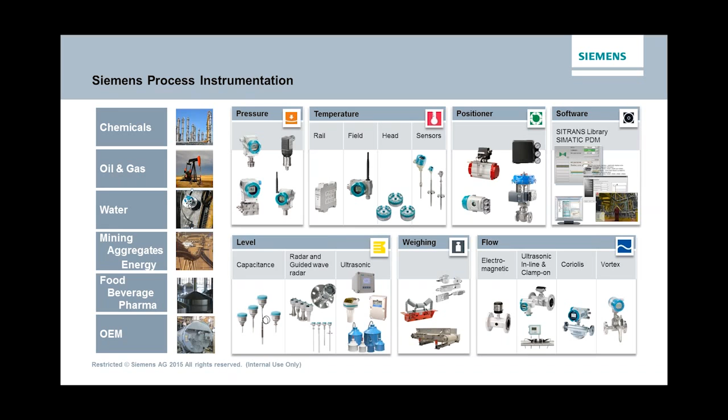Here is just a quick overview of the portfolio that Siemens offers. We've got pressure, temperature, positioners, and this is the area that I'm responsible for - capacitance, radar, guided radar, ultrasonics, controllers and transmitters. Today we're going to be focusing on transmitters, which are designed for short range. We have weighing and bin meters and such, and we target all types of industries - chemicals, oil and gas, water - and also there are a lot of OEM customers that purchase our product to fit it with their solutions.

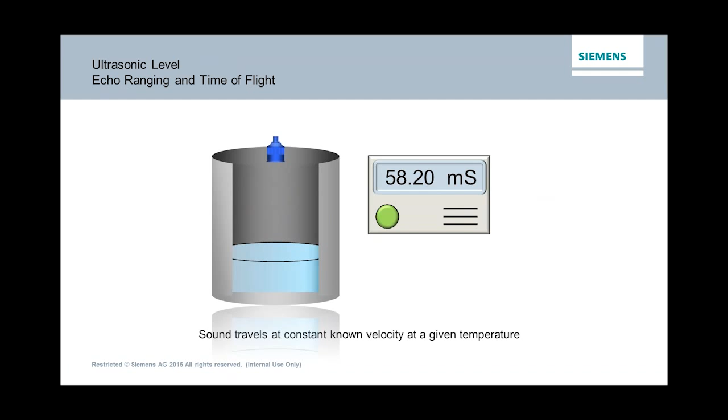And I'm glad to say that same functionality and everything, it's coming in at a third lower than the price. Not a third the price, but just one third lower.

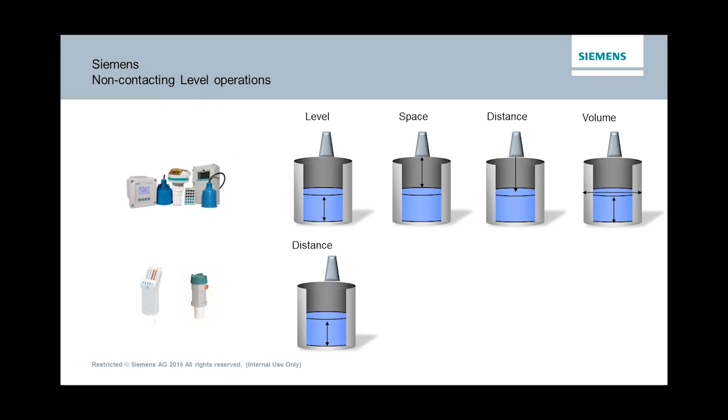But of course, when an instrument can do more, this also costs you more. So the application will dictate what instrument is best suited for you, and what needs you have to choose the right application. But today it's not about products.

It's about learning a little about sonic intelligence and where you use it. Sonic intelligence is what we use to provide a fast and easy product setup. And you will see today, in the industry, instruments have become really easy to set up.

In some cases, instruments will have wizards you can follow. You don't even have to open the manual. They've gotten so sophisticated, and the algorithms and features do a lot of the work that you had to do manually in the past. So you don't have to do that anymore, except in special cases.

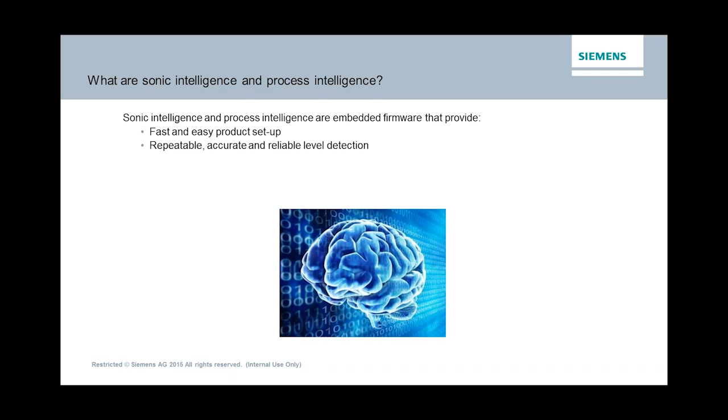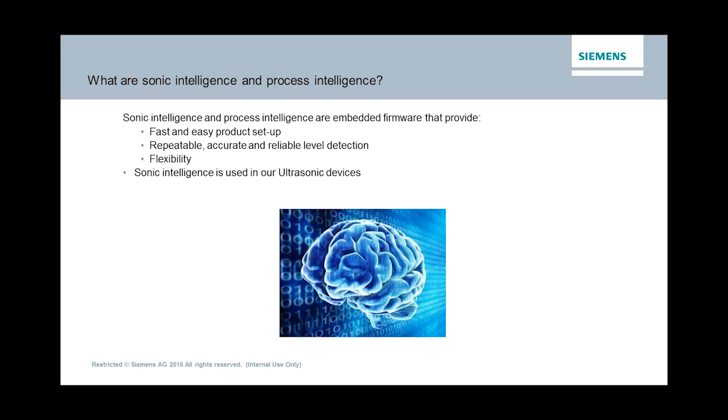The sonic intelligence and process intelligence give you repeatable and accurate measurements, and flexibility in case you want to read level, volume, open channel, all those things. Use sonic intelligence in ultrasonic products, and process intelligence in radar.

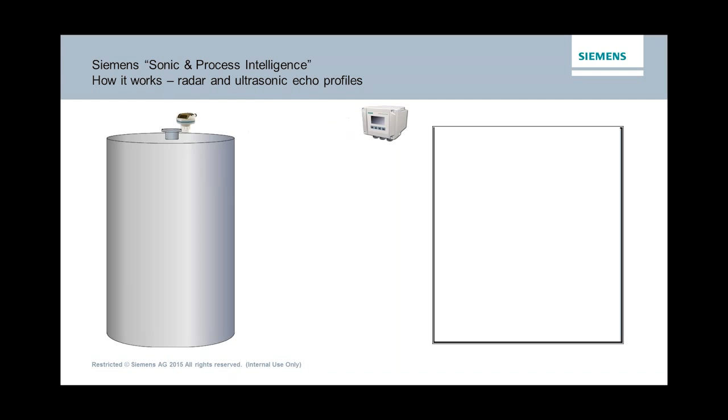Here's an example of what happens in a tank. Specifically, as the level goes up, there are multiple signals - not just one signal being sent. This can be for radar, ultrasonics, or even a transducer connected to a controller. The principle is the same: you have a pattern, a signal traveling down to the product.

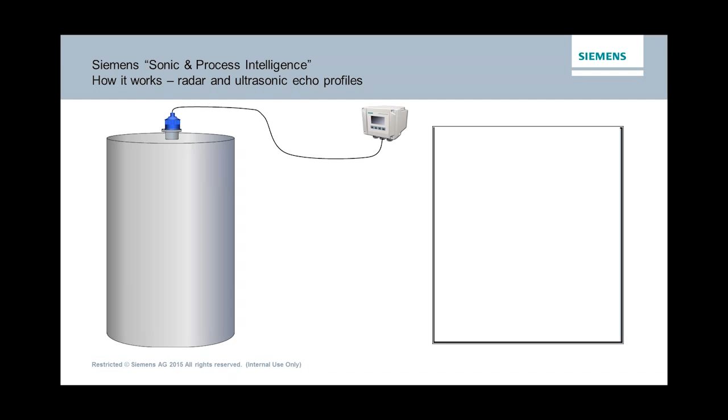In some cases, if you're talking about a metallic tank and using a lot of power, there can be acoustical noise from the fill stream. All that gets converted to some kind of signal that's picked up. And if you fill it up, there's more bouncing on the surface of the product back and forth, and that creates multiple signals. So all that needs to be handled and eliminated.

You don't have to worry about how to do that, but it's important that you understand that if you have too much of one thing, like noise, you might have to do something to minimize the effect. So we filter that.

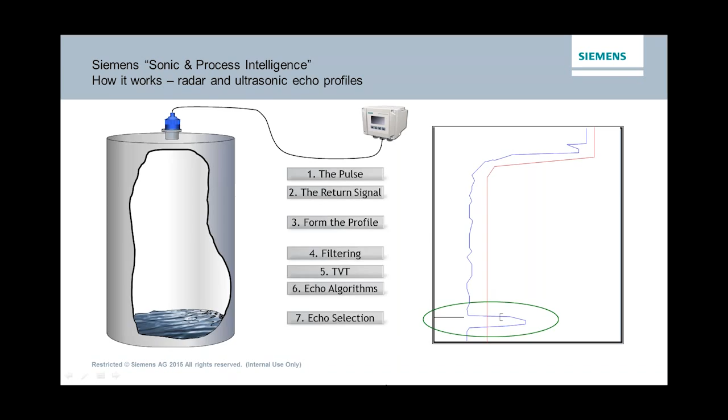In terms of filtering, you don't have to worry much about it. We do it automatically. Algorithms is another story.

I mentioned there are multiple echoes that you can get, and here's an example where you see that this echo crossed the red line, and we have another broad echo that crossed the red line. So those two, and here's another echo that looks like an echo, but it's not big enough to cross the red line, so we don't even evaluate that.

In most applications, 95% of the time, you don't have to do anything. But based on the installation, based on the standpipe and things like that, you might have to make some changes to this. So having a little bit of understanding what that means—not only having the understanding, but having the capability of doing it, because not everything supports this. Having this can help you maximize or eliminate things that can cause problems in an application.

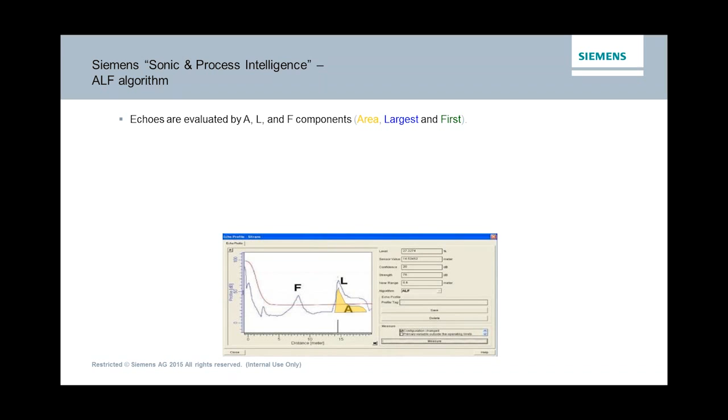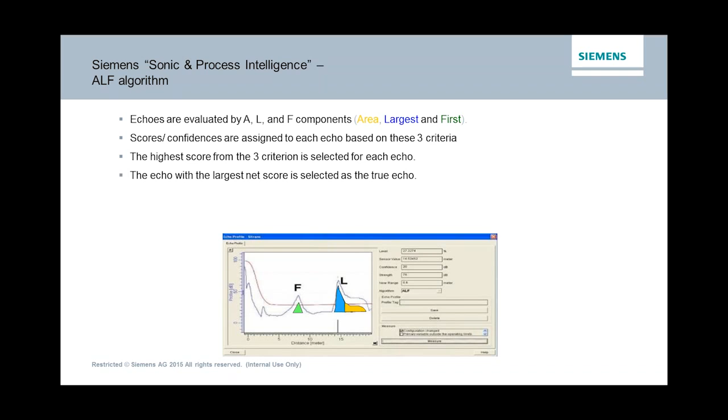So let me explain a little bit what this is. We're looking at the criteria, and based on the score every echo receives is the one that's going to be selected. So we're looking at how big an echo is, or the area. We look at the area of the echo, every echo—this is the area underneath the curve. We also look at how high it is, or how tall the echo is, and also is it the first echo, or in other words, how close to the face. So we look at all that and start doing a lot of mathematics behind it to select the right echo.

In the example that I'm showing, you can see that this one in the green circle was selected because it has the most area and it's also the largest. There are many variations.

There are situations where you might want to select the largest only. In some situations, you might select the first only, and I'll show you an example in one of the applications that I will show you, the actual applications. In some cases, you want to show the area—area is best used with solids. So LA, or largest in area, is best used for solids. For liquids, BLF, meaning best of largest and first, is best suited for liquids. But there will be situations where you might want just largest or first, and I'll show you a couple of examples of that.

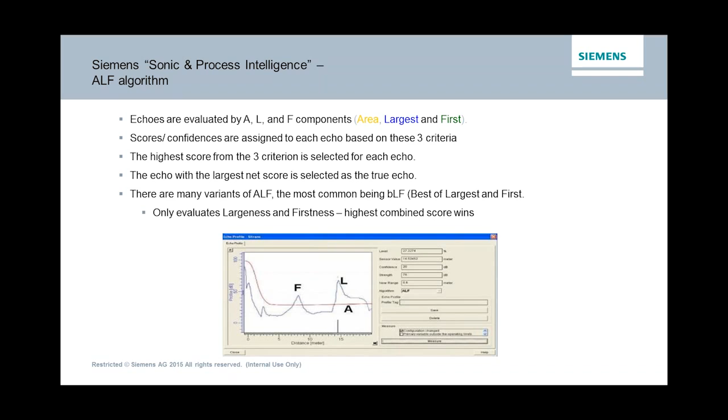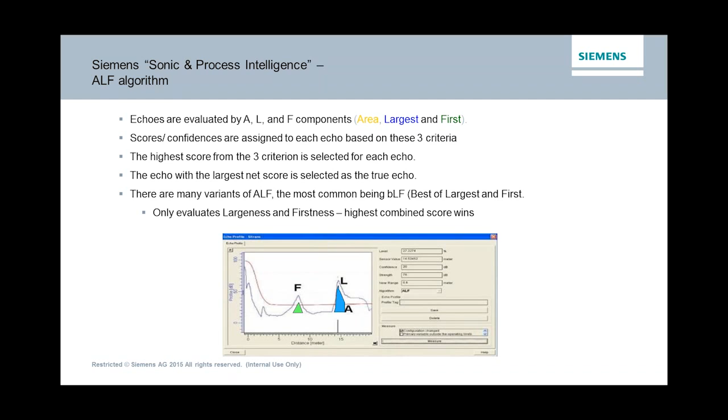You can only select one and give all the weight to one echo, and that will be the one that is forced to be chosen.

So, mounting considerations. Before I move into that, I want to say something that you might be familiar with—some rule of thumb. Some people will tell you it's good to follow a 10-to-1 rule. The 10-to-1 rule means for every 10 feet you go down, make sure your instrument or your sensor is 1 foot away from the wall. That is a 10-to-1 rule. So if it's 20 feet, then you need to be 2 feet away from the wall.

There's two assumptions here: one, that you're dealing with a sensor that has a 12-degree beam angle, and also that the wall you want to be away from is a smooth wall, not one with a ladder. If you have a ladder, you need to make sure you be a little bit more away from that ladder. Again, if you're using a 6-degree beam angle, then you can go 20-to-1.

But a 10-to-1, if you apply it to most things, you'll be okay. I like to say either one of these: use a 10-to-1 rule, or 1/3 the radius of the tank. If you have a process connection that is 1/3 the radius of the tank, you're in good shape.

So here's an example of installations, and they show you—hopefully you can see.

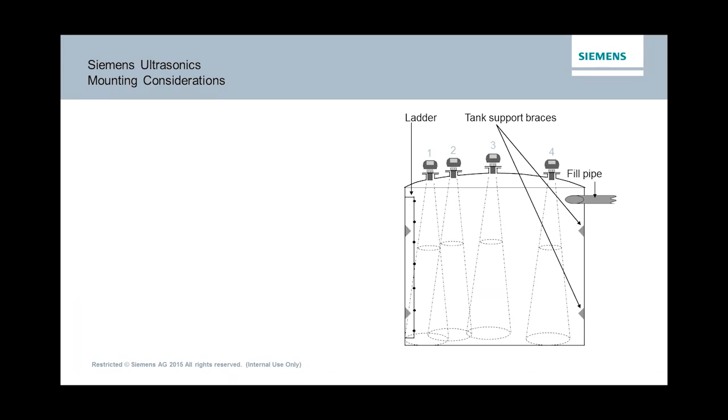You show the different positions, and my question to you is, what is the best location based on what I just told you? Is it 1, 2, 3, or 4? Location 1 is too close to the tank wall, and if that is the only location you can install it, we could work with that and do some suppression of the signal, but it takes a little bit more work.

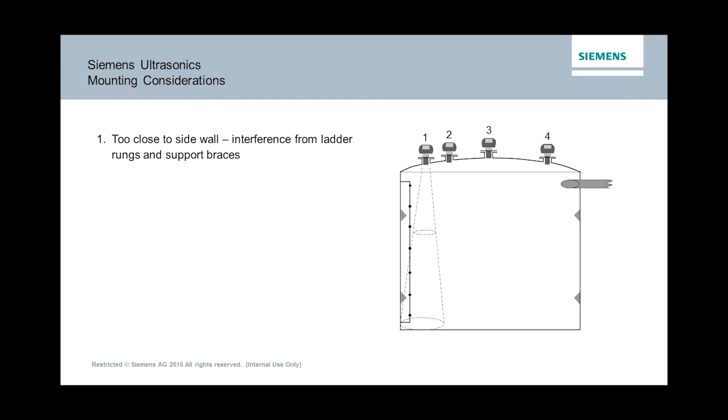Location 2, that's practically what I was saying earlier, is about one-third the radius, roughly. And that's a good place to install.

Location 3, we can work with it, but now we get this parabolic effect. What that means is there's going to be a focal point, typically around 80 or 85%, where the focal point will happen. You're going to get signals that add up and signals that cancel out, but some of the signals that add up double or triple in size, and they're more attractive, and they look farther away.

So you might have a situation where you say, you know what, I'm almost full, but my reading is telling me that I'm 20% full. That's wrong. It could be that you're in the middle and you catch a multiple echo. So the ideal thing to do is move it away from the center.

But if you don't have a process connection, then you use the algorithm and tell the unit to lock on the first echo, not on the largest, because the multiple echoes tend to be larger because they're adding. So that's what you want to do.

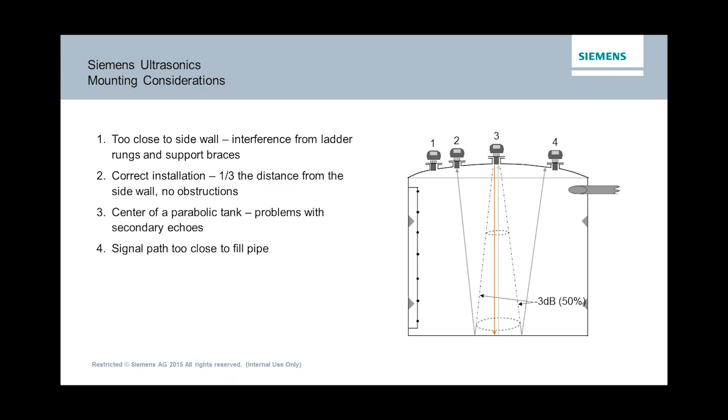Location 4 you don't want to use, because the fill pipe will be on this side in this case, and it will interfere with the signal path. And we don't want that. It will work when there's nothing coming in, and it will fail when product starts coming in.

Another key point: all non-contacting devices—that is, radar would be one, ultrasonics would be another—they require a blind zone or blanking zone. And it depends on the model. Some can be 12 inches, some can be 10, some can be 2 feet.

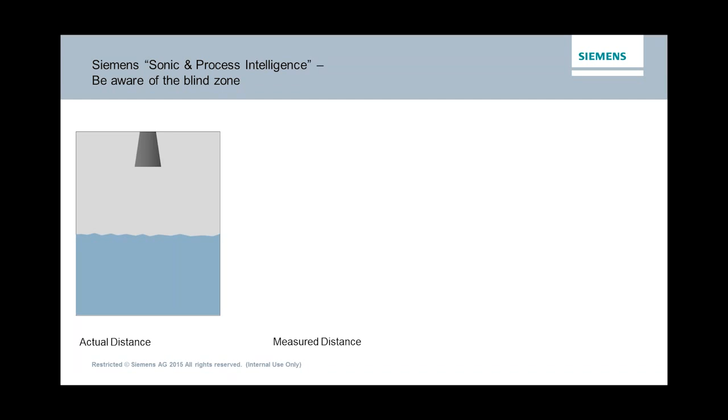But don't bring your product inside the blanking zone, because then you start entering an area of contention. So if that is the blind zone, the big area, here's your product, and as long as you stay below the blind zone, you're fine. Again, if you enter the blind zone or blanking zone, the behavior can be random, and the more likely conclusion is there's something wrong with the product, when the reality is the material is entering that area.

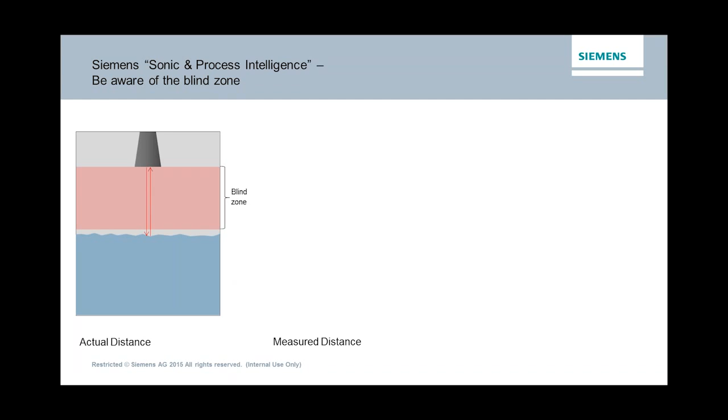This is one of the reasons, if you have a small tank, you might consider using guided wave radar, because guided wave radar allows you to bring the level higher, or capacitance—I'll mention a couple things about capacitance later. If you're dealing with a small tote or tank and you cannot afford to lose 10 or 12 inches of that tank space, think of using guided wave radar or capacitance.

That allows you to get to, there are models that allow you to get to the very top, depending on the model. They could be more expensive, but today the price has come down, so it's a feasible solution.

A small tank will require, if you're dealing with something like a barrel, more likely you want capacitance. But if you're dealing with a 10-foot tank, more likely you have space to spare, and having a blind zone is not an issue. You can also have a standpipe, but we want to minimize the standpipe or process connection length or height. They bring other problems—we can work with them, but they're not a simple 1, 2, 3 situation.

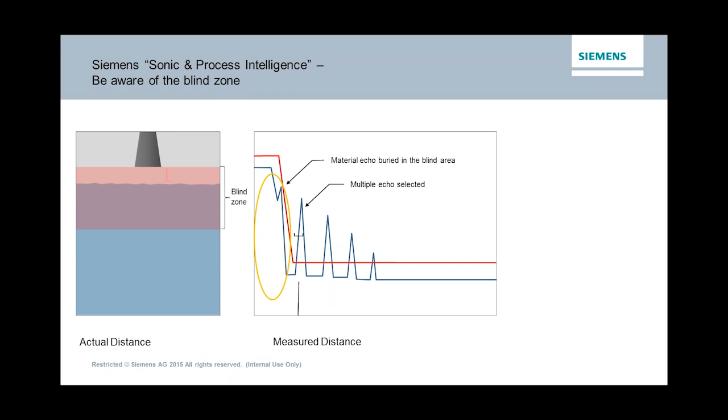And it gets worse as you get even closer. The level gets higher, and now the signal goes all crazy, and multiple echoes are occurring, and now we're deselected from this signal over here, and we're reading here.

Why do we need this space? It's because in ultrasonics there's a crystal being excited by voltage to resonate and send a signal and travel - in other words, an echo. It requires some time to reach a steady state, to settle down and be able to receive. But when it's happening too quickly, the crystal is still excited, still trying to reach steady state, while another signal comes back from the outside and gives it more excitement, so it never reaches a steady state. That's where the contention begins.

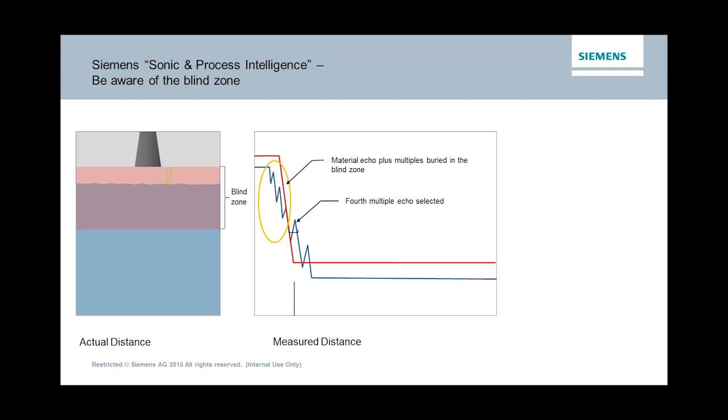I could express this like a dialogue: it's best when one person talks and the other listens, so the whole message goes through. When both talk, some words will be understood and some won't, and the message is convoluted and you lose a clear message. Same with this - that's what we want to make sure, that we don't interfere with the blanking zone or blind zone.

Other things to consider: if you're dealing with applications that are really hot, above 212 Fahrenheit, or with vapors. Solvents create vapors, whether due to the process or from overheating in summertime, specifically in Texas, Arizona, places that are really hot. Or if you're dealing with severe dust or a slightly foamy surface.

I say slightly because the best technology, not the solution, but the best technology for foam when it gets a little heavy is guided radar, single rod - that's what you want, it's not a solution. Foam is a problematic issue for technologies. Also, if you're using vacuum or extreme low temperatures like cryogenic, ultrasonics is not suited for that - those are radar applications. So knowing this, you know where you can use ultrasonics: stay away from volatiles, vapors, high temperatures, and pretty much everything else you can do with ultrasonics.

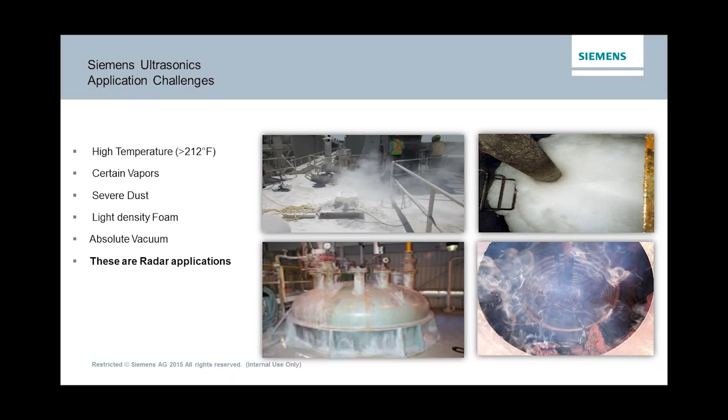Some application examples - I'll show you some products that are good for small vessels. This is the one I was telling you about earlier, the LU150. It's a two-wire device, good for a 16 foot range. You can program that with 2 buttons, set it up for 4 and 20, and it can be 2 feet to 3 feet, or 2 feet to 10 feet, whatever you need.

140 Fahrenheit maximum temperature. Even though it's a new product, it's based on a platform with a lot of experience, so the functionality is the same. It does have a better enclosure housing - this one has an IP68 housing, meaning it can be submerged under water 2 feet down for 24 hours with no ingress in the product. While submerged, the product doesn't work because the speed of sound travels way faster, but once the condition is corrected, your instrument is ready to roll.

This can be used in chemical storage tanks, solvents, additives - again if you have solvents and, like I said, inside a building where vapors don't exist, you can use it there. Flotation cells - this is mostly for mining. If you have questions about that, I can come back to this picture and explain something about it.

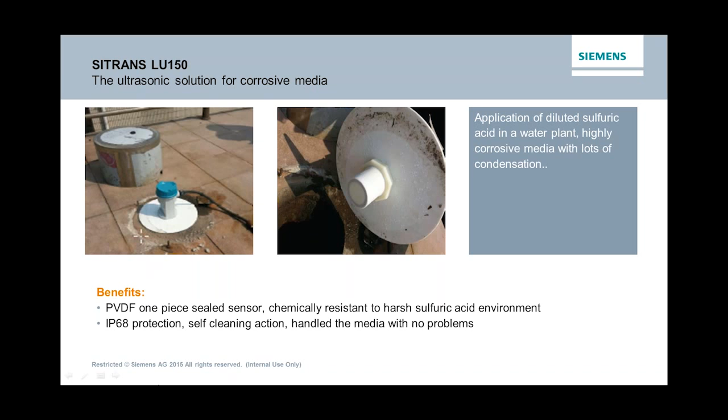There's some condensation - I don't know if you can appreciate that. The mechanical action of the crystal tends to push that moisture away and provide a reliable measurement. If the condition of moisture gets to be too much, then you've got to find other ways to keep that moisture away from the sensors. But the key here is that it's compatible with corrosive media, and it's an inexpensive solution, like I mentioned earlier.

This is an open channel. I know that it's mostly closed tanks and totes, but just to show you, this was using an open channel. It's not the ideal solution for open channel, but some customers don't want to spend the money or don't have the budget for that. So in this case, you take the level measurement, and the conversion to flow is done at the PLC.

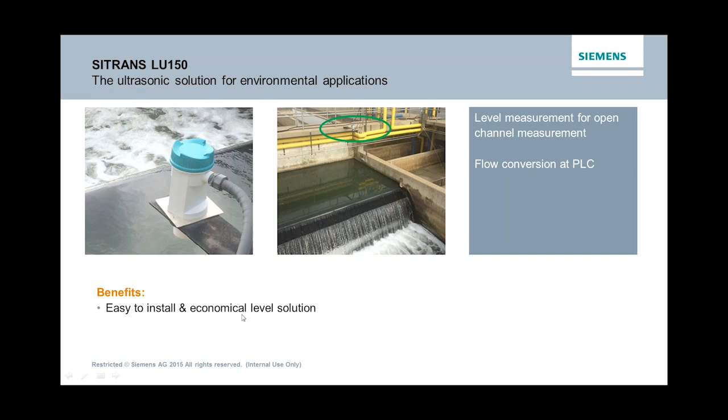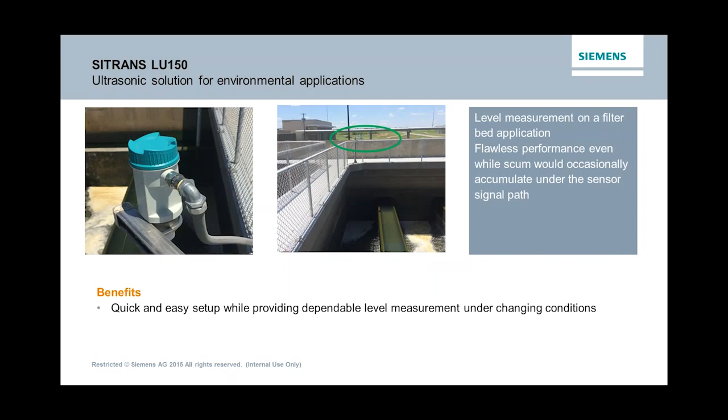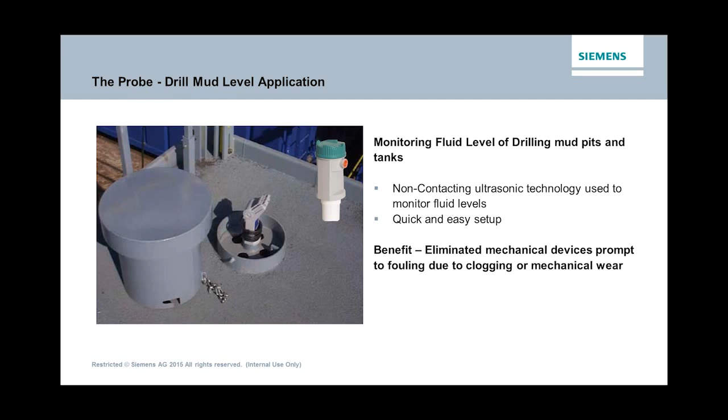The LU150 can be used for this application, and it can be used for that. The Probe has been in the market for a good while, for a few years. I want to just give you an overview. It's a two-wire device, 20 or 40 feet. This one has HART, and I'm mentioning it here because I've got some examples.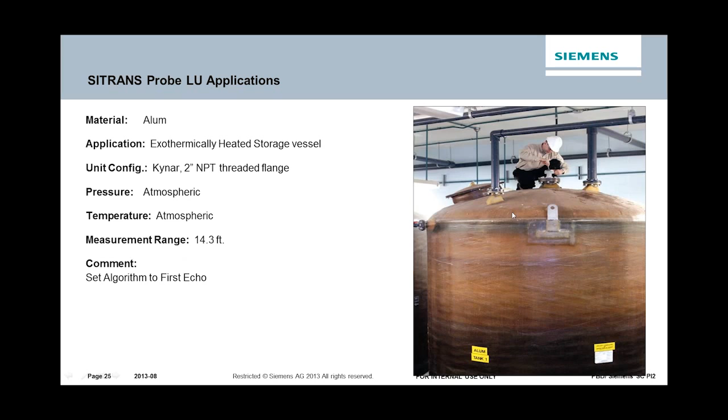Here's an example where this unit was installed in the middle of the tank, and I said earlier that's not a good place to do that. So being that that's the only place you can do this, it required changing the algorithm to first echo to prevent the unit from locking on the multiple echoes. That's where you use the algorithms. In most cases, if you install this somewhere like that, you will have to do that.

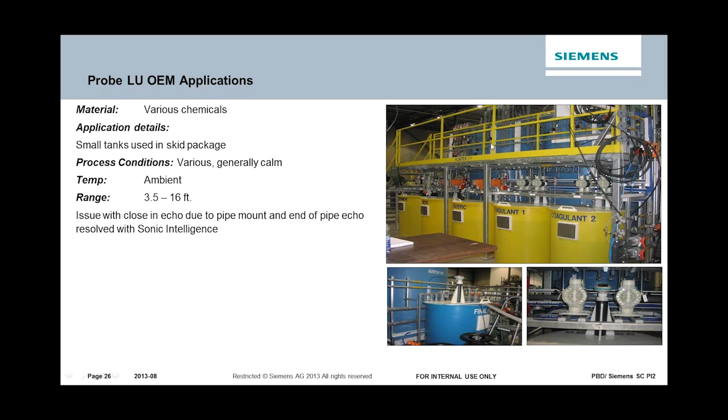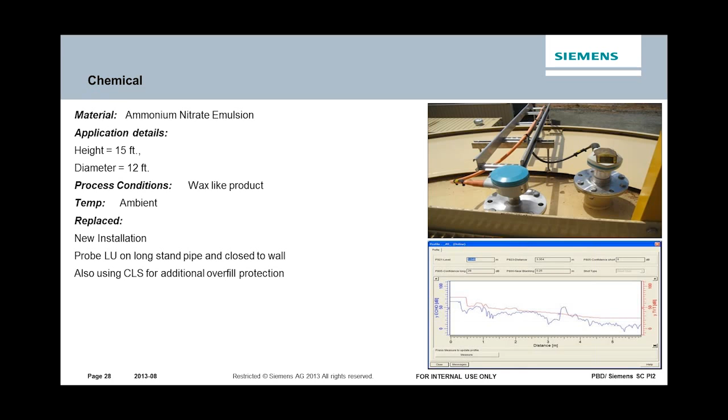Because of this, they don't want spilling, so they put capacitance also as a high level warning. It's always good, when you want to prevent spills, to use an alternate technology. In other words, don't use the same technology, use something different.

First, capacitance. Let's talk about capacitance. Capacitance is good for small tanks, small totes. The one thing to consider with capacitance is it's essentially a capacitor. The wall is one plate, and the actual rod is the electrode.

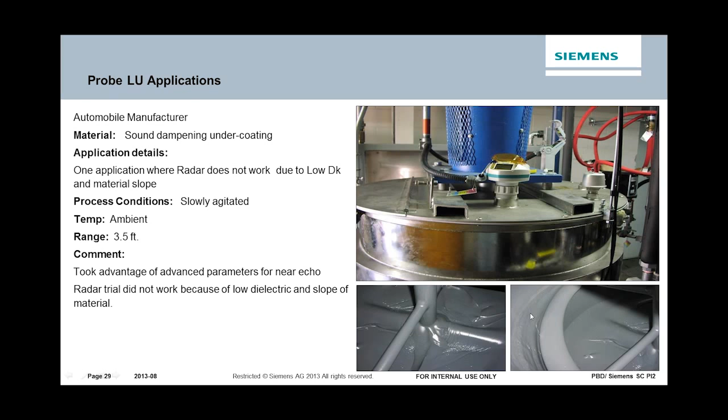In between is what we're trying to read, in this case it's the dielectric. So when the product moves up and down, that's what we're reading, the dielectric, and we convert that into a signal. The challenge with capacitance is if you're dealing with low dielectric products, as that dielectric changes, your output also changes. So make sure you're using it with a product that is very consistent. If today you have a product with a dielectric of 6, and tomorrow you mix it and have a product with a dielectric of 10,

your output is going to change even though the level is the same. You don't want that. So if your application calls for a consistent product and it's a small tank, capacitance will be the way. But if there's some changes in the recipe, tomorrow you have to add something else, you'll find yourself tuning capacitance quite a bit.

So if capacitance is not a viable solution, then you can go to guided wave radar. Guided wave radar is different than capacitance. The signal travels on the rod, back and up and down. It can even be used for interface of oil and water, for instance.

It handles high temperatures, high pressures, and if that dielectric changes, if it's 5 and goes to 20, it doesn't matter. You still get a signal that is consistent with what the level is. So you prevent those fluctuations that you would see with capacitance.

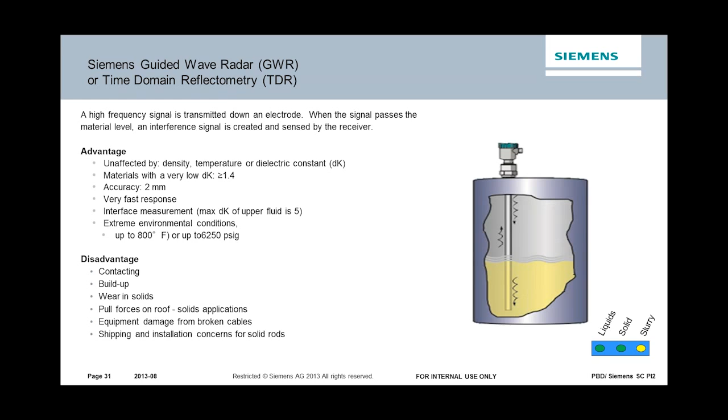The disadvantage of guided wave radar is that it's contacting, so you have buildup issues. If you're dealing with solids, there's a lot of wear and tear. And if it's a tall silo or tank, there are a lot of pull forces, and we'd rather use radar for that instead of guided wave radar. We don't want broken cables going down the system.

So essentially, time of flight is just that. You send a signal, it travels, it can be acoustic or electromagnetic wave, it comes back, and you determine the level based on the time of flight.

They're easy to install these days, easy to program and maintain. They're non-contacting, so there's no maintenance associated with them, and they give you accurate level measurement. Because in ultrasonics, although it's dependent on sound, there's a temperature sensor in these sensors to compensate so the sound is adjusted. That's something we're able to do with ultrasonics to compensate for sound.